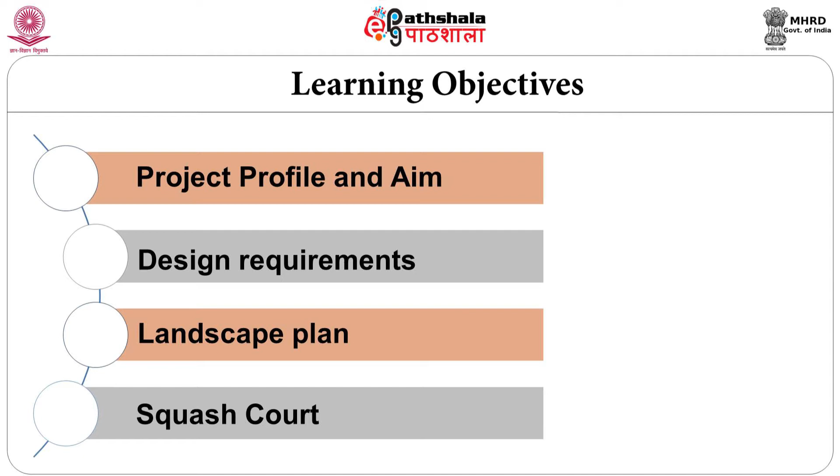In this context, we have to take care of all the local requirements to design the park. Plus, you have to think in terms of local identity. How are you going to show the identity of the park?

In earlier days, people did not know that a gallery can be done in one corner where no activity takes place in front of the gallery. So we have to break open the gallery.

Then you have to think in terms of orientation, which is more important. You cannot have a playground on the east-west orientation because sunlight will affect the eyes of the player. In my career, I have trained 7-8 students who were providing a tennis court on east-west orientation. They were saying they can plant trees to give shade.

That is not the answer. The answer should be very clear that a playground has to be oriented only north-south. You cannot ask an aeroplane to land on an east-west orientation because the sun glare will blind the pilot and you will have a disaster. Similarly, sun glare on the player will not improve the quality of the game, and he will also get a headache. So you have to think in terms of providing proper orientation for your games activity.

Now, after the development of all these things, individual playgrounds and individual activities are getting developed slowly. But still, group playing and all those things happen in larger open spaces.

But this particular park, which is in Gopalapuram, heart of Chennai city, has roughly around 4 acres of land earmarked for a playground.

So when you have a playground, you need to have multi-facility. Nowadays schools have become shrunk and very small open spaces are available in schools. So for people to conduct their sports activity, march past or ceremonies, these playgrounds play a major role in bringing out the good children from the school.

So what are we going to do in this? How are we going to develop this into a multi play area development?

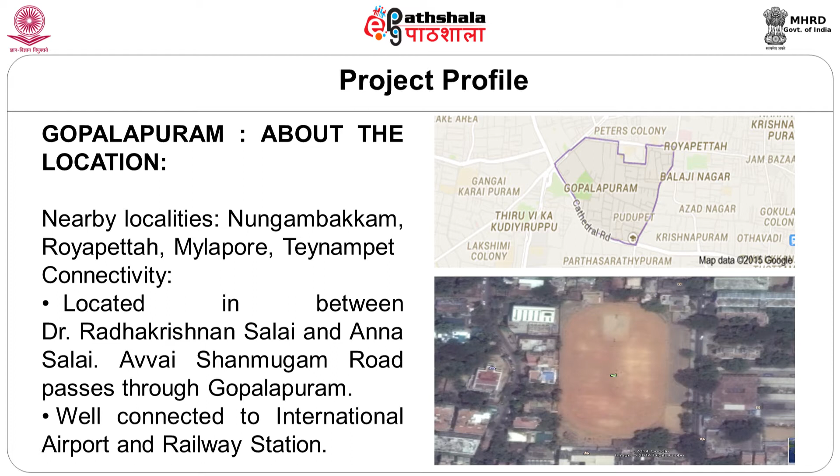Gopalapuram, about the location - this is located in the heart of the city. We call it the Nungambakkam, Royapettah, Mylapore and Teynampet connectivity.

This particular site is something around 4 acres - I was telling you, it's around 4 acres. Now we are thinking in terms of spending around 5 crore on this project. Existing, people are using it as an existing playground, but people have not developed it in a proper fashion.

So we have to develop it more scientifically for all the play requirements.

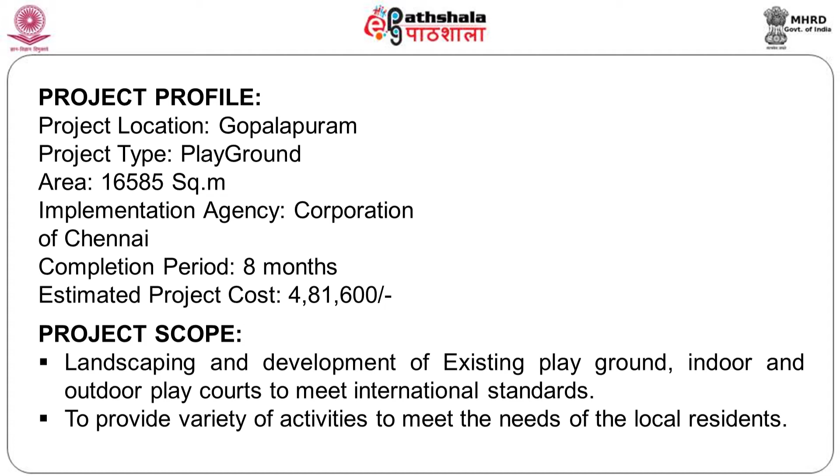Overall landscape character is also very important, and you have to have all indoor and outdoor play close to international standard. And to ensure public access, provide variety of activity for all ages of people. Children play area and adventure games, indoor and outdoor gym with privacy.

Seating and tree pits for senior citizens. Walking and jogging track for multi users. And apart from that, since this is on the main road, you need to have adequate car parking facility and two-wheeler parking.

People can just sit and chat also. It's not just that you need to play, you need other activities also. You need a huge viewing gallery for people to watch any competition or games, people can sit and watch. That is also required.

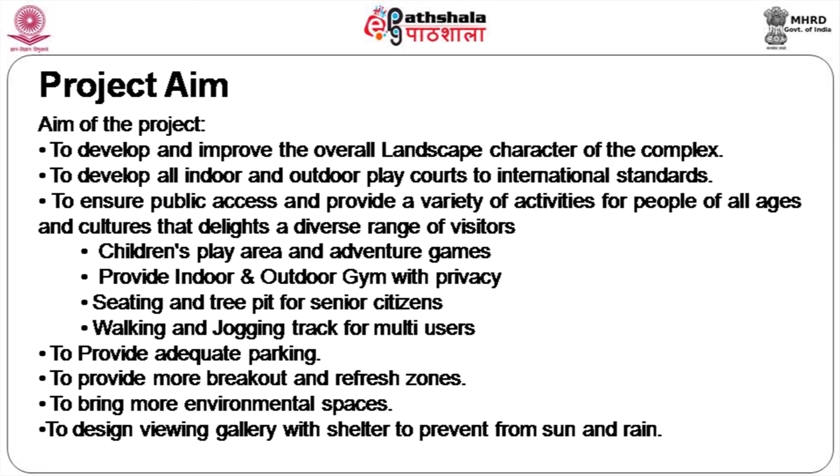We are talking about age group 3 to 6 years: playing area, food court, drinking water facility, children's play area, play equipment for them, sand pit - all these things are required.

6 to 18 years means you need a cricket pitch, viewing area, drinking water facility is always required, and then skating area is also required.

Eighteen to 50 years - you need to have an exclusive area for each sport, especially basketball, volleyball, cricket, tennis. All these things are required, and you need to have a gym for women.

50 onwards, you need people to have exclusive walking track or jogging track, seating facility, yoga and meditation areas are required. So in general, what is more relevant and possible in this kind of area is provided.

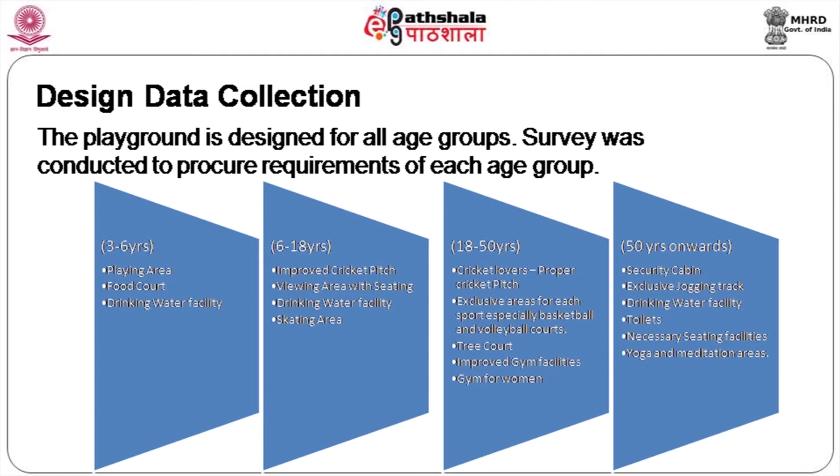So basically what we are looking at is you need to have an entry, compound wall and a gate, parking facility, walking track, jogging track, tree court, gymnasium, children's play area.

You are also thinking in terms of squash courts, and you also need to have rain shelters and sun shelters, cricket, football, basketball, volleyball, skating rink, and for people to learn cricket you need a net practicing area. You need to have drinking water fountains available all around this playground, benches and dustbins.

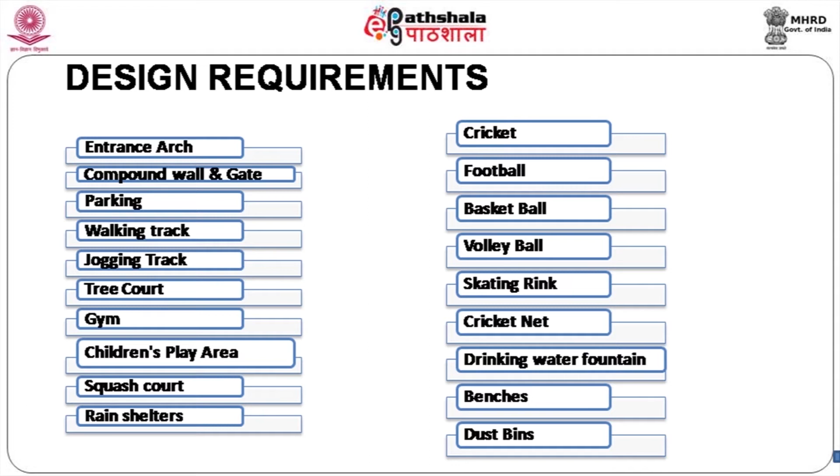So these are all the basic requirements of a play area. So what is more important? Exclusive tracks and courts, necessary facilities, ancillary spaces. This is what we are looking at - a new improved playground will be happening.

Of course, squash court is inside the building, but still there we have to follow that activity in north-south. Then you have two different walkways and jogging tracks.

You have a playground, a larger playground with just a mud area, no grassing or anything. For you to maintain the grass in that large area will be very difficult and it will be trampled. It will not be able to be maintained like a stadium, like our cricket stadium or football stadium where you can maintain the grass, but not in this kind of public playground.

And you have a basketball court which will normally be concrete. Volleyball can be sand, or can be normal soil.

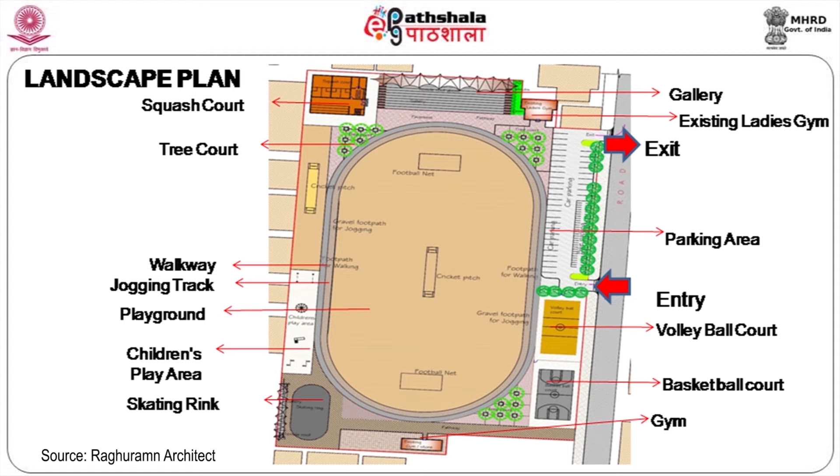Then you have a parking area, galleries for people to view. Then you have entry point and exit point with car parking and two-wheeler parking facility available.

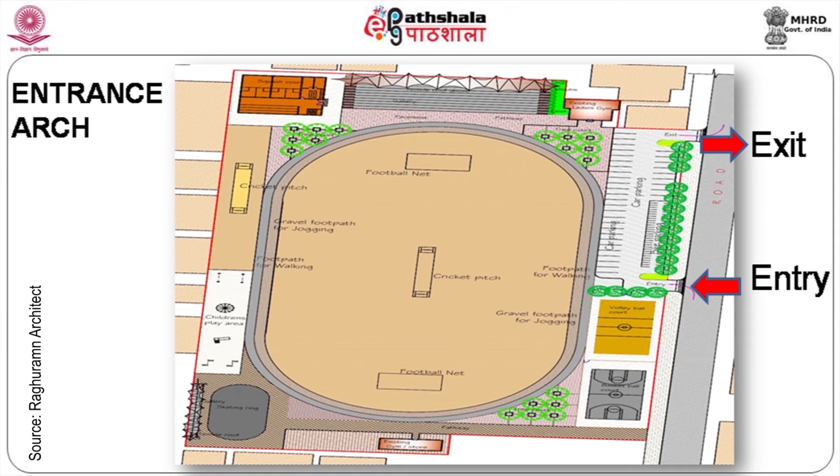And any game you take, it's all circular. Cricket ball is circular, football is circular, tennis is circular - any game, you take it circular. So we thought, your Olympic symbol is also circles. So we thought as a compound wall, we need to have a circle as a concept.

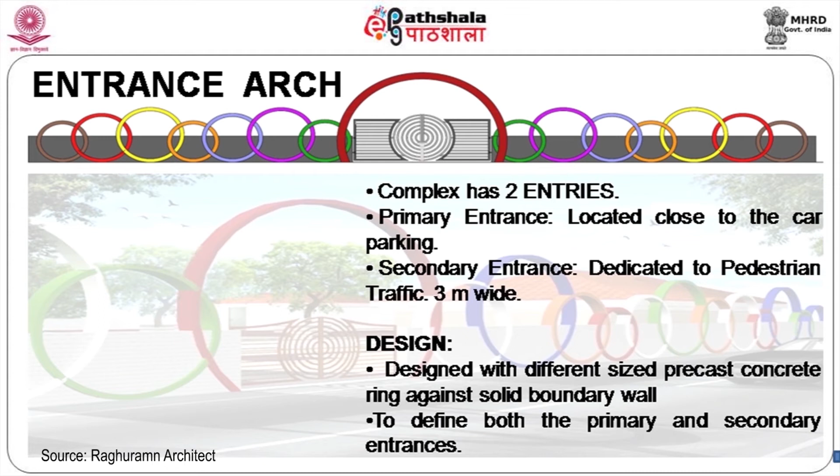Then you need to have meshes for your basketball, and fencing is required so that the ball won't go into the main road and affect the traffic.

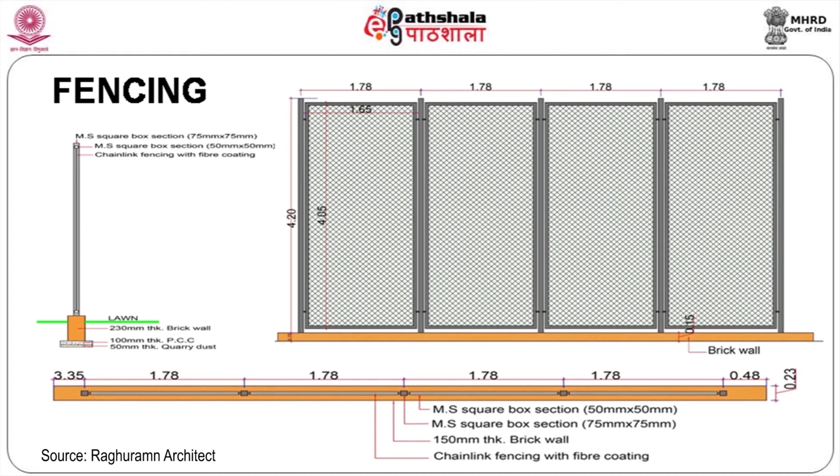Then you have a car parking facility, designed parkings are available with two-wheeler parking. You have a cross section showing the tree, two-wheeler and then car parking.

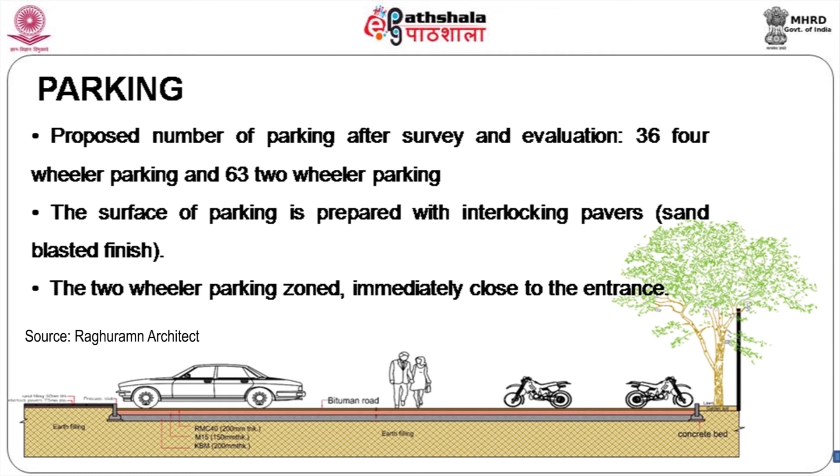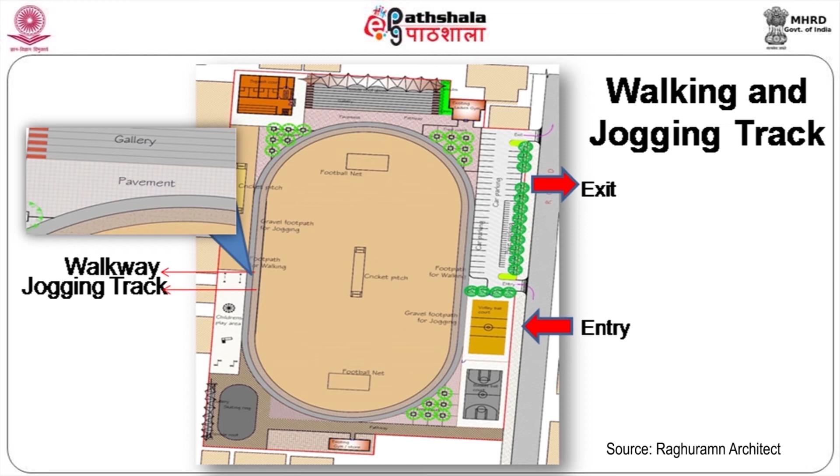We are talking about walking track and jogging track, two separate things. So two different materials are used so that when you are jogging, you have a soft surface underneath you. When you are walking, you need a harder surface. Jogging track width is around 2.4 meters all along the periphery of the ground.

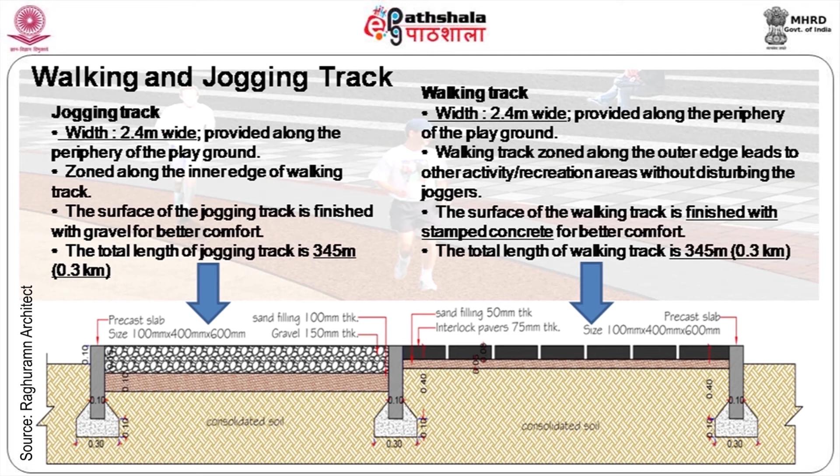Tree courts are provided for shade purpose with seating arrangement.

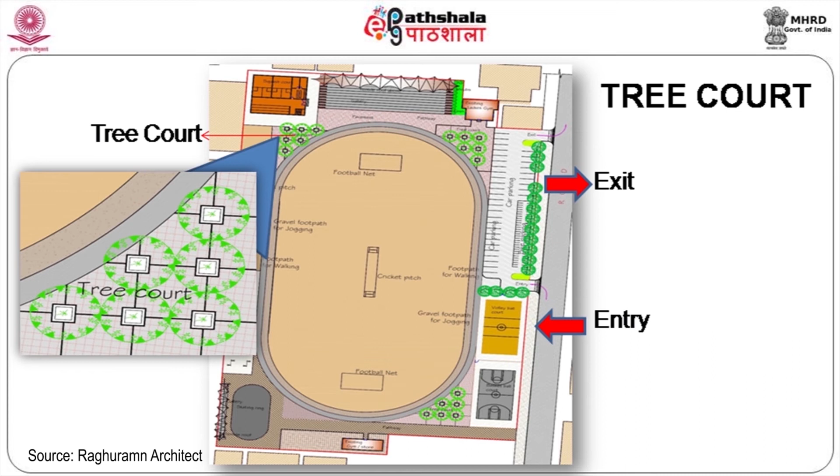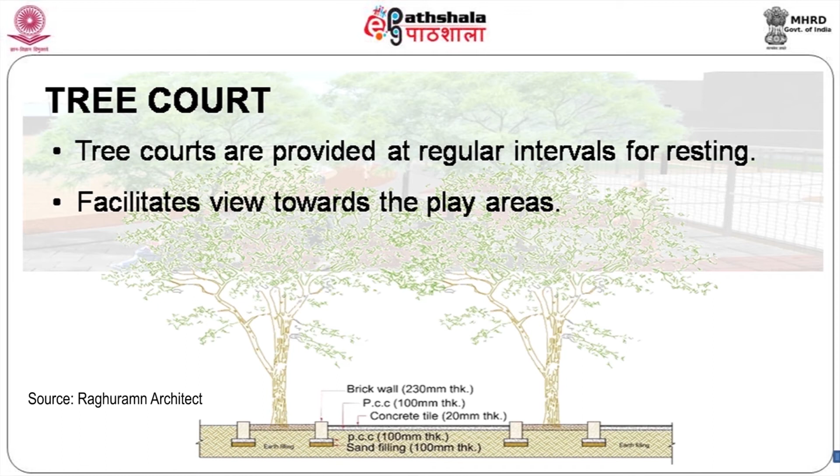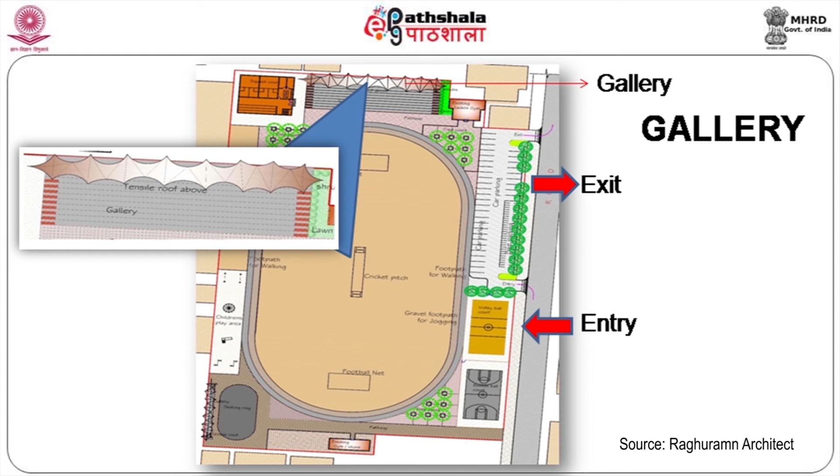Then you have a gallery for people to view the activities in the park and in the playground. It has a roofing also available.

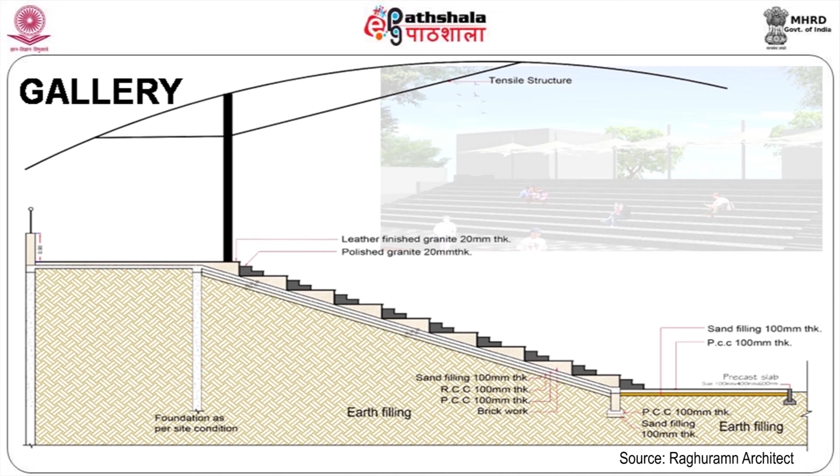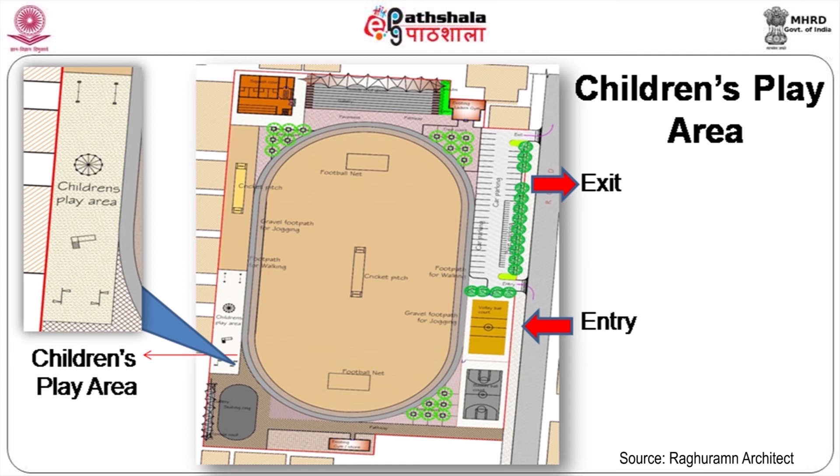Then children's play area with play equipment for the kids - normal seesaw, swing, slide, merry-go-round. Some more adventure sports also can be added, but in course of time we will be adding it.

And of course, this area is also fenced up mainly because any ball kids are playing with should not go into the neighbor's house or anywhere next to that.

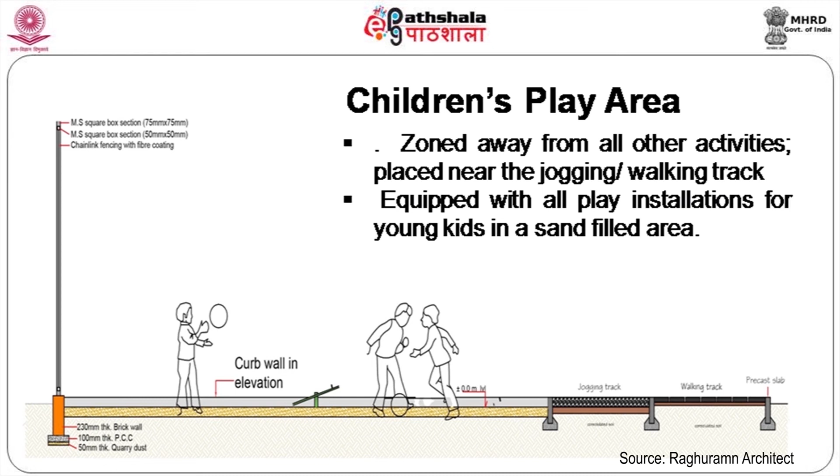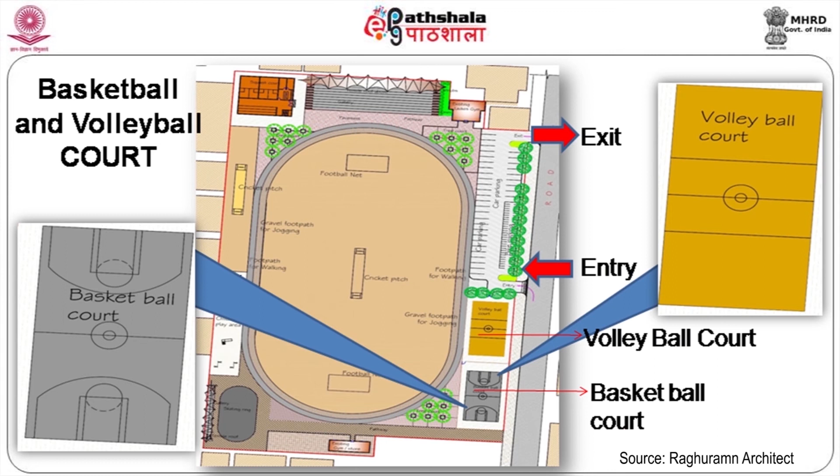Then basketball and volleyball court. Orientation is very important. I have failed some students of mine when they give an orientation of east-west for any games - they say a tree will come and cover it. That's not the right answer. You have to think in terms of orientation, which is very very important when you are designing a play area.

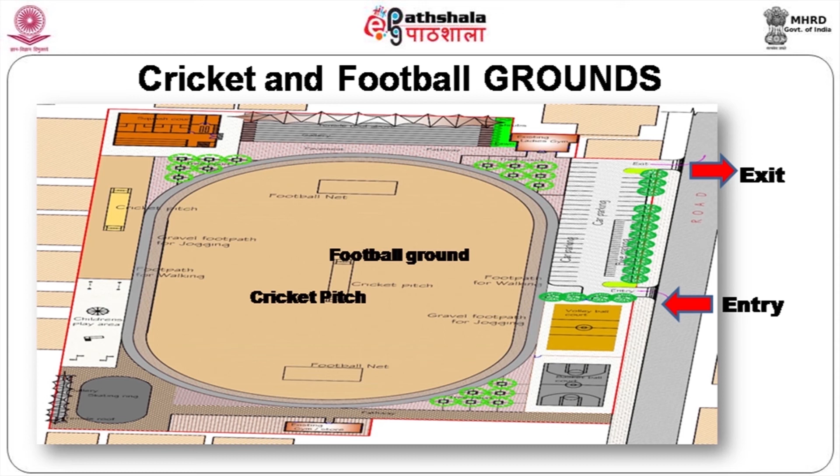Large football or cricket ground. You have the areas, you have the courts available for you to play.

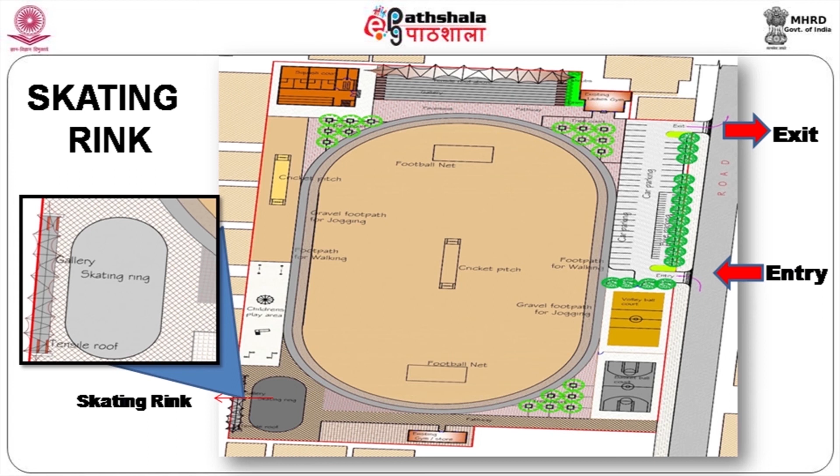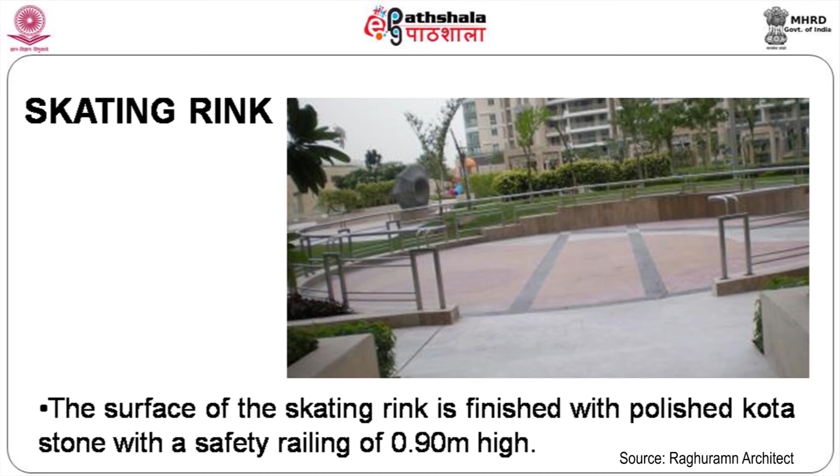Then the skating rink - you need to have a proper flooring for the skating rink and proper railing facility, and for people to change their shoes and other things you need a place. That's also provided there. And it's with Kota stone, polished Kota stone, so that it's a smoother surface on the floor and people can do skating properly.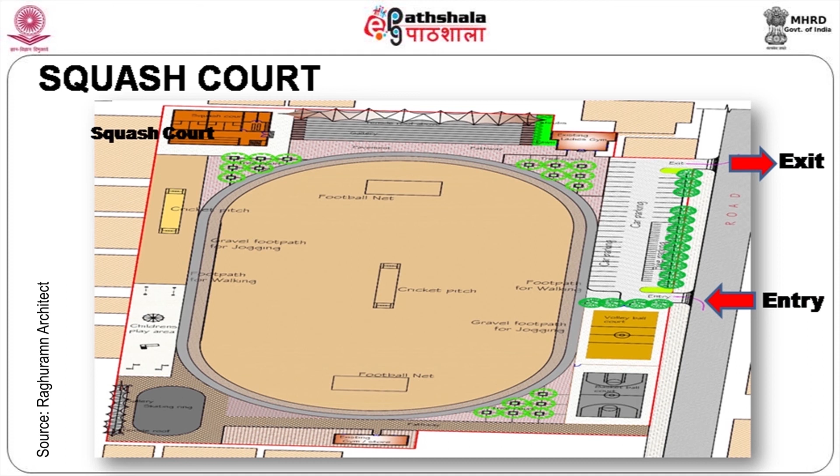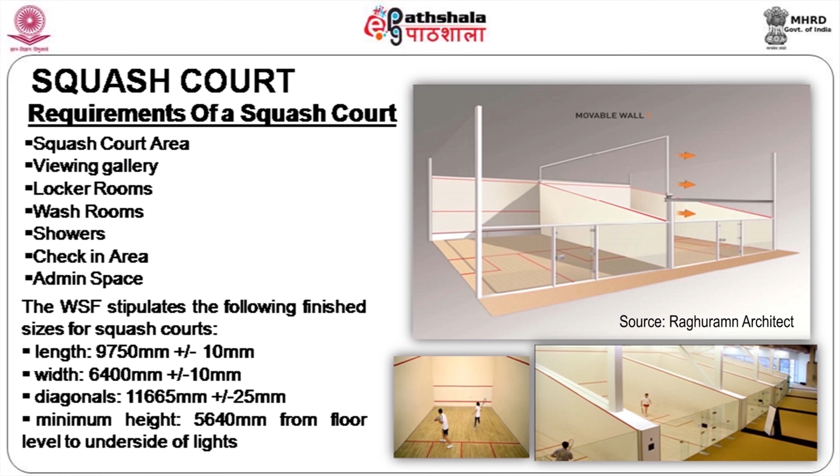Squash court, international standard squash court. You can see the way it is provided. And sizes and finishes as per international standard we have to do it.

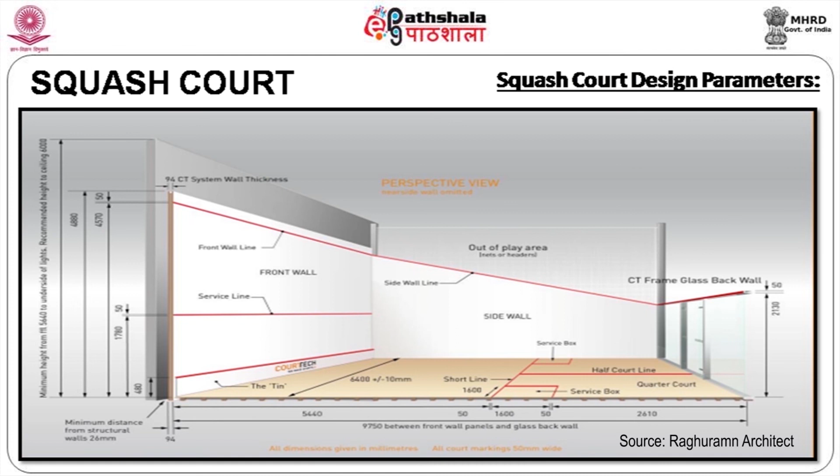Viewing balcony is mainly for the umpire to stand and watch, not for the people to stand and watch. Viewing gallery is in the upper level.

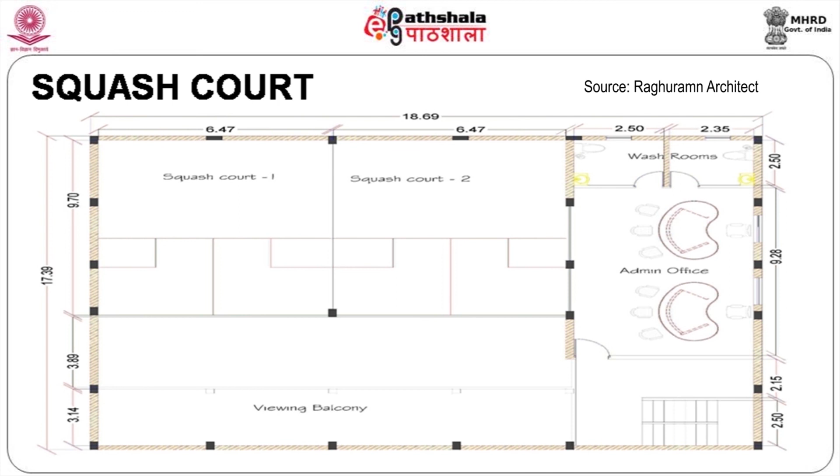Now we are talking about the conclusion for the Gopalapuram project. Earlier we talked about the identity for different activities.

Here when you go through the design, everyone is satisfied, everyone's requirements are taken care of, providing a huge gallery for at least 500 people to sit and watch any program, any sports activity. You can have 400 meters running relay races, 100 meters race, or whatever kind of race you need to conduct for the school sports activity will take place here.

Then you will have cricket nets provided on the side, so coaching of cricket is possible. Then you have a small skating rink for people to enjoy the skating. Then you have billiards - we have great players in billiards in India, so we need to develop this sport for everybody. So that also will come up in this particular ground.

Of course, you have ample parking for the people. Thank you.